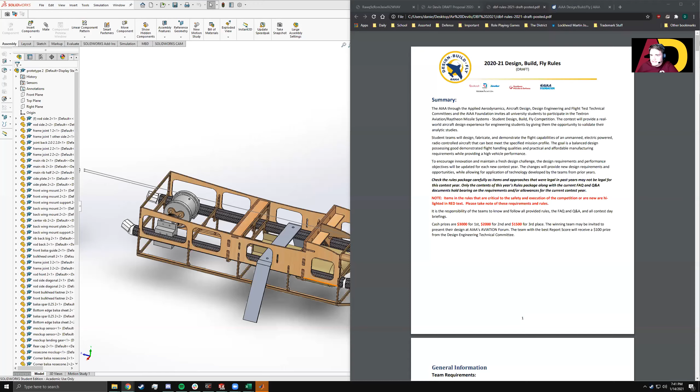All right, so yeah, we are Air Devils. We are the AIAA Design, Build, Fly competition team here at Arizona State University.

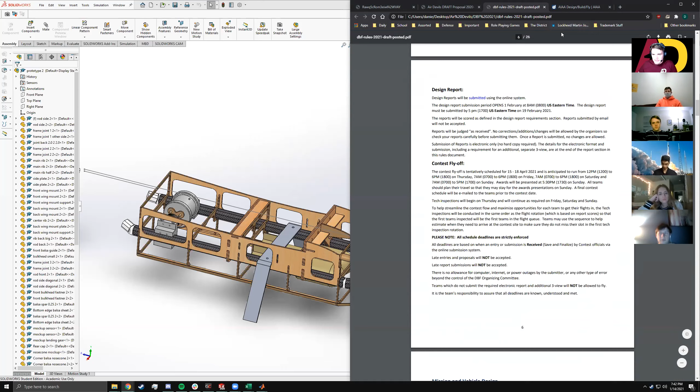Every year we design, build, and fly a new RC scale aircraft to compete in the AIAA's competition. This year it will be taking place in Tucson, Arizona in mid to late April. Hopefully in person, but that is still being decided. We will know more in the near future as they tell us.

This year's competition is to design, build, and fly a UAV with a sensor suite. It is supposed to transport a sensor in a shipping container, deploy that sensor mid-flight, operate the sensor, and recover it before landing. Our aircraft are generally about 5 feet wingspan, and generally less than 20 pounds.

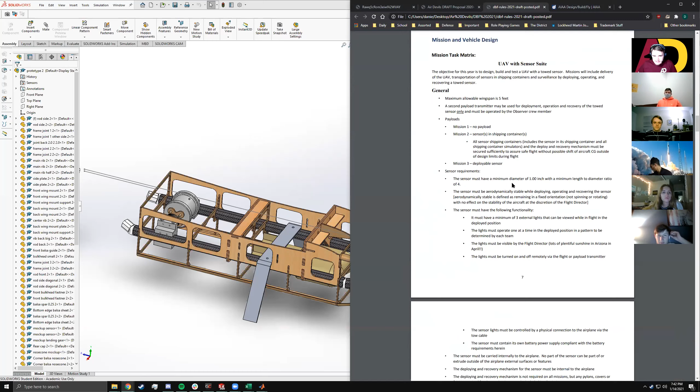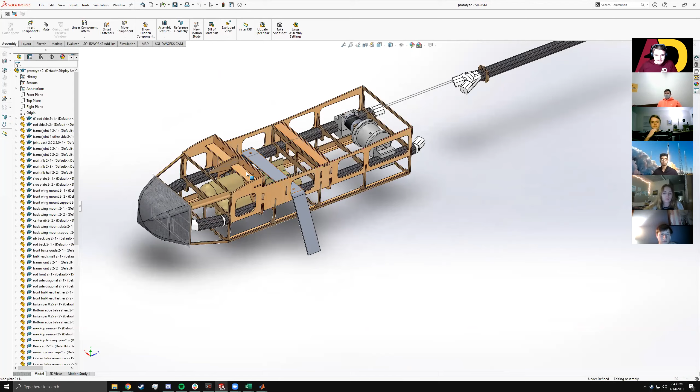This year's competition necessitates a lot of finicky mechanical devices, such as a bomb bay, a retraction and deployment mechanism, and a lot of flexible structural work to fit in the contradictory requirements of fitting a lot of sensors, but also going fast at competition. So we have been hard at work trying to encompass all of those requirements into a single cohesive airframe.

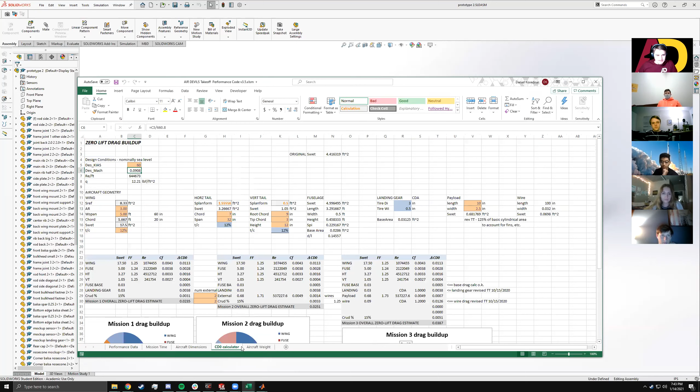In order to do that, we have been doing a lot of design synthesis with spreadsheets, trying to better estimate our aircraft's performance and size our aircraft before we actually build it.

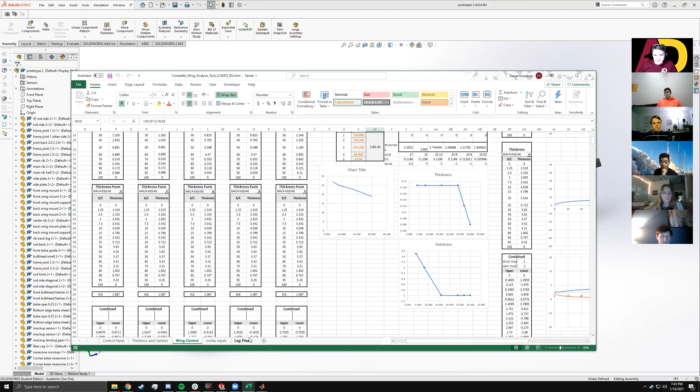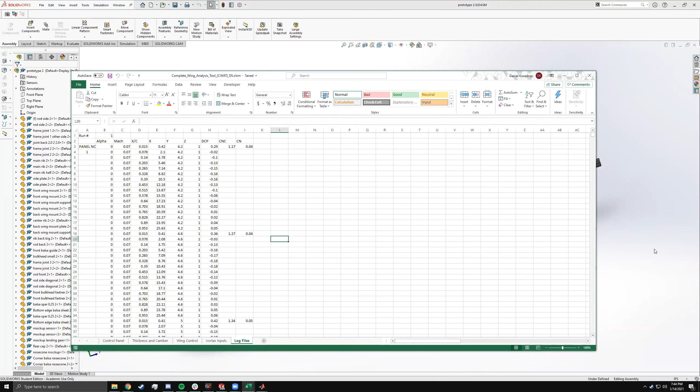We have also done a lot of aerodynamic work trying to design the best wing for our aircraft. That was me and Evan Barkers and Derek Stratton, who's not here with us right now. This was our graduate class project in the Advanced Aerodynamics class, MAE 564, I'm pretty sure.

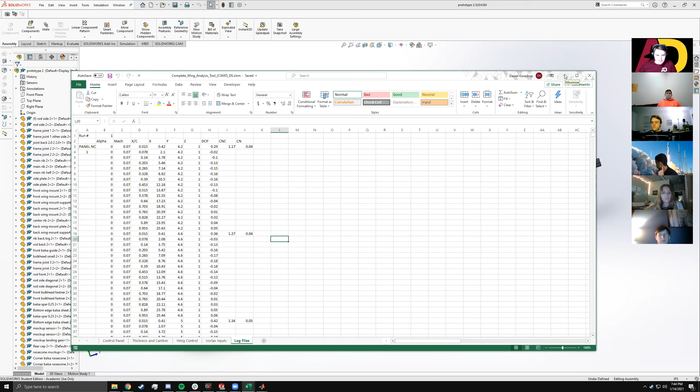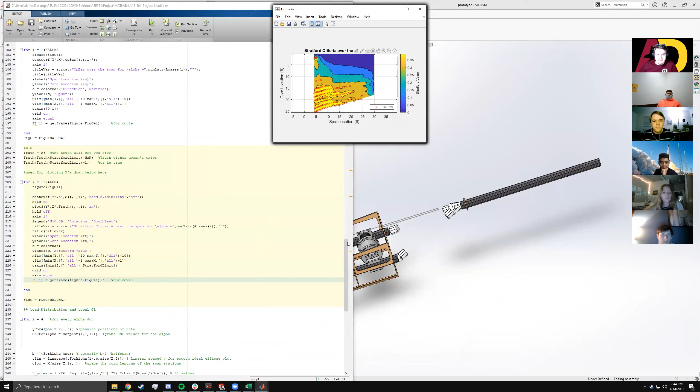Okay, this code has finished and I can show off some of what this is. So here you can see the approximate stall characteristics of this aircraft as we get into high alpha. We've done a lot of work to try and get this as smooth as it is.

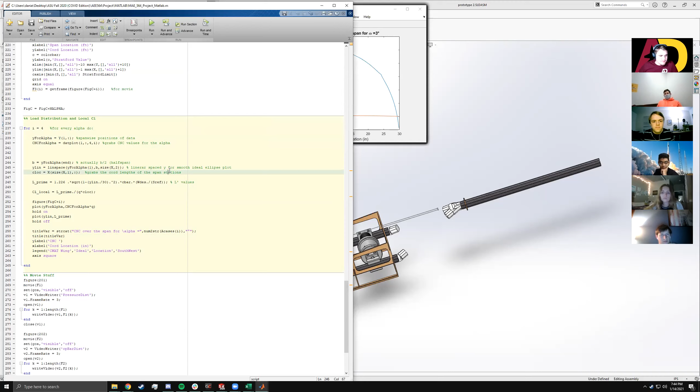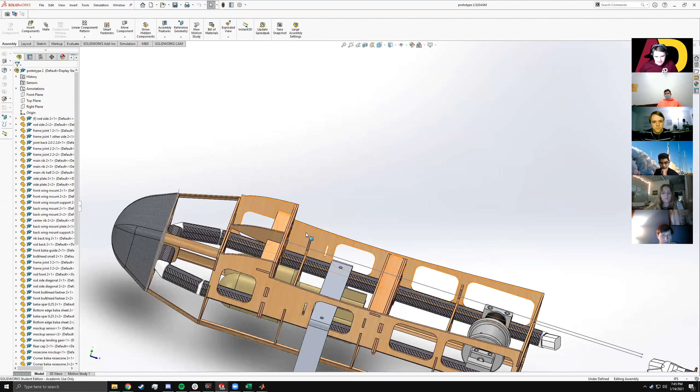So this is the work we've been doing so far on the airframe. We still have a lot of work to go in terms of actually finishing up the retraction mechanism right here. We have to finish up the bomb bay doors, and we of course have to build this thing, which requires a lot of laser cutting and 3D printing, maybe even some carbon fiber composite work in order to get all these pieces to fit together correctly and create a living, breathing, flying aircraft that doesn't breathe, hopefully. That'd be really weird if their aircraft did breathe.

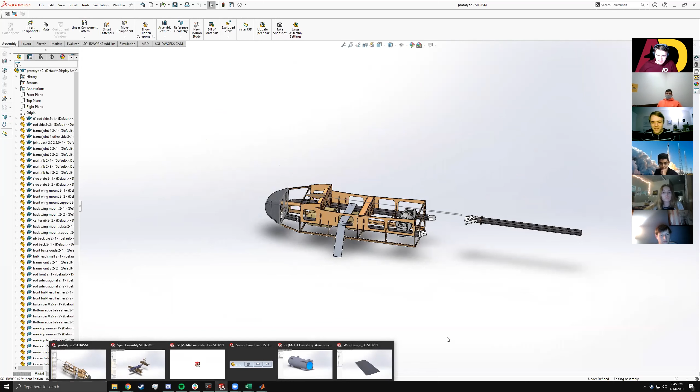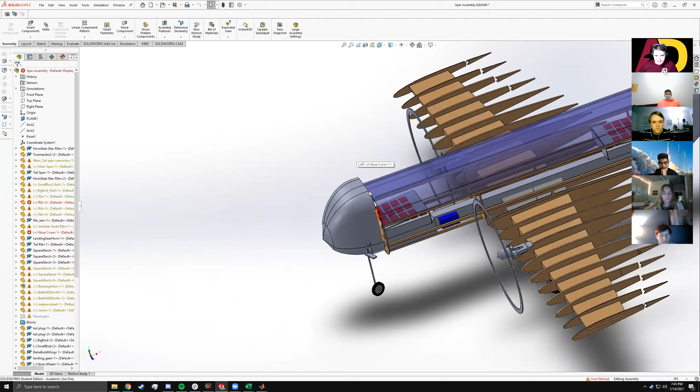So we've been hard at work trying to put together our airplane. For reference, this was the CAD model of our completed 2019 or 2020 aircraft. It has a few model errors in the CAD just because of the version change between last year and this year's model of SolidWorks. But other than that, yeah.

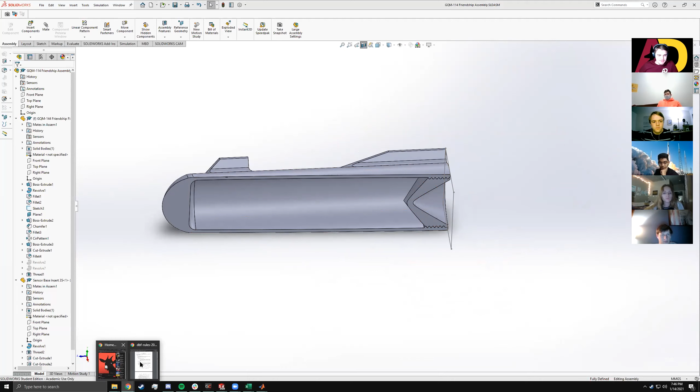Here is something I've been working on recently. It is a model of our new sensor. We got a change in the rules that was communicated to us, indicating that the sensor design was not what we thought it would be. And as such, we have been forced to change what our sensor looks like.

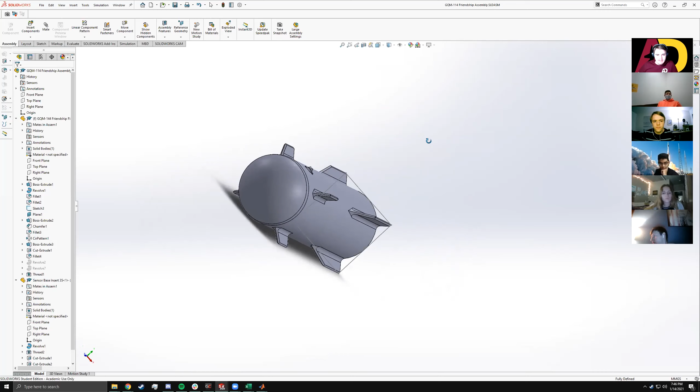I've been working on this quite a bit today, but it seems to be going pretty well, and I think it'll work out for having a stable design that is able to carry a bunch of stuff. There is a hollow back section that we can fill with weights and our sensor equipment. It has a towing point, fins for stability, that kind of thing.

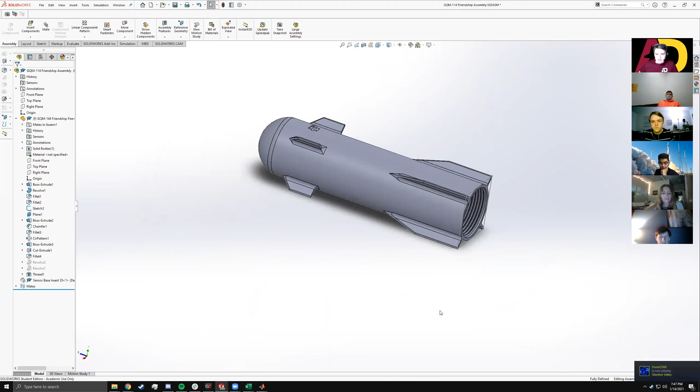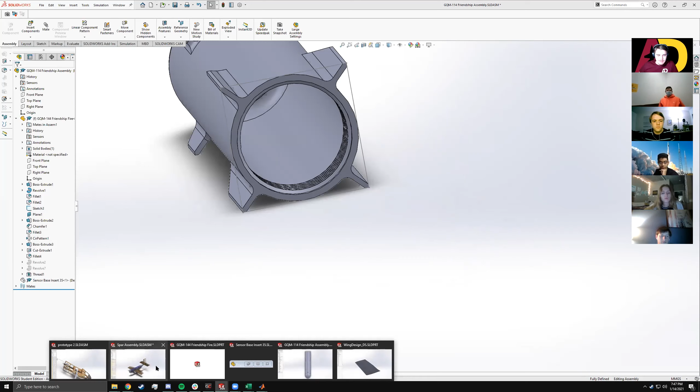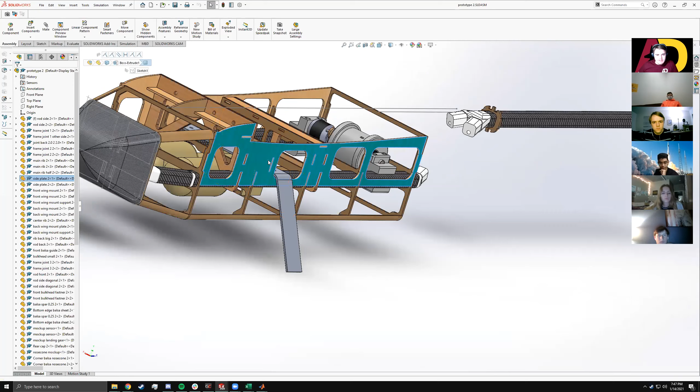To get into the brass tacks of what our meetings are like, this semester we'll be doing a lot of construction, as safe as we can in outdoor environments, assembling the aircraft from parts that individuals will get made on campus. For example, all these side panels will be laser cut on campus at the laser cut lab, over by ECG, where you can also get 3D prints done. We'll laser cut all these panels and fit them together, sort of like an advanced Lincoln Logs or Lego set.

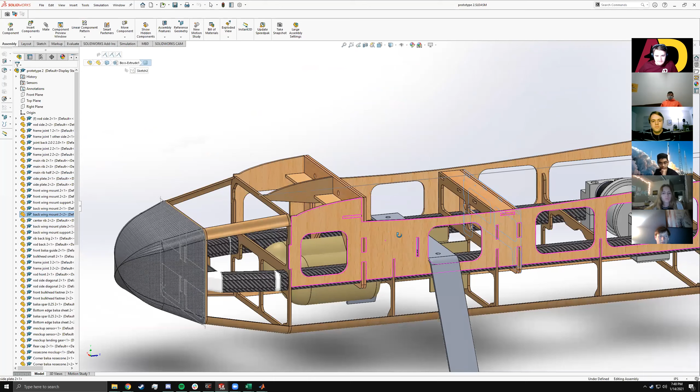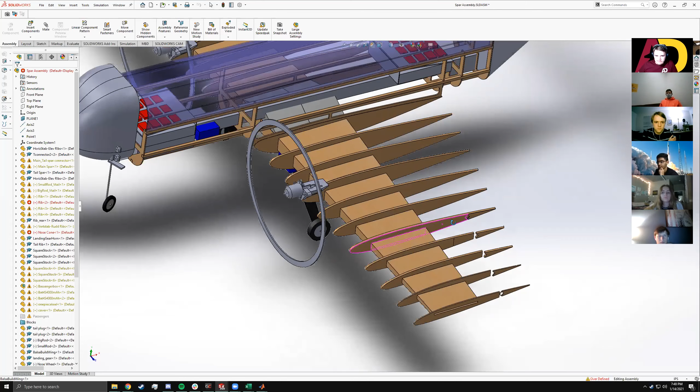That'll be a lot of fine labor to get all these parts to fit correctly, but that's what this club is all about. Once we have that done, the wing also needs to be assembled. It'll look something like this wing, where we have a central torque box that has airfoil pieces acting as formers for our design.

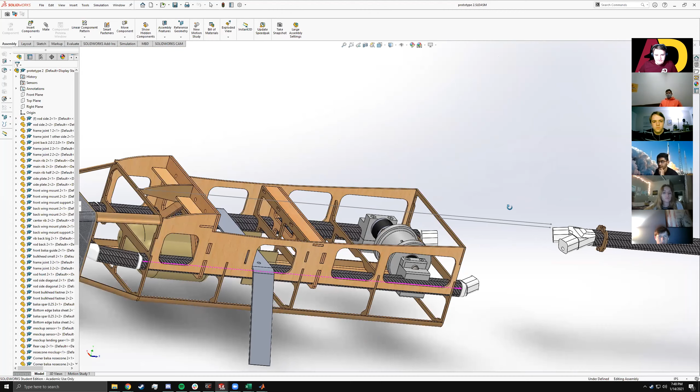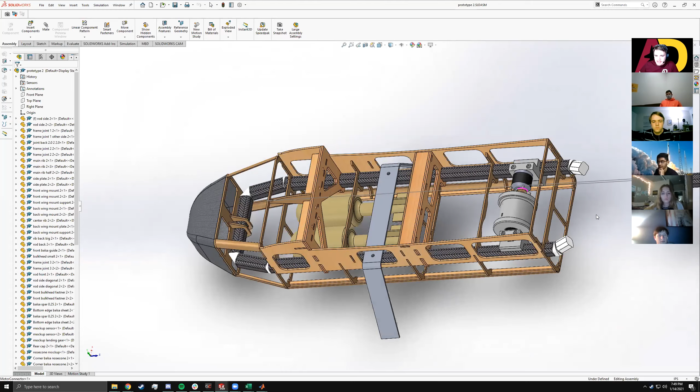We'll cover it all in plastic sheeting and we'll have a competition-ready aircraft. Of course, that's the ideal situation. In reality, we'll have to do a lot of fine-tuning and adjustments as we go on to correct any mistakes we find in assembly, as well as fine-tuning working parts of the aircraft, such as the drum mechanism here, which is probably going to see a few revisions before competition, as well as making sure the bomb bay down here works every time, because if it doesn't, I'll be very sad at competition.

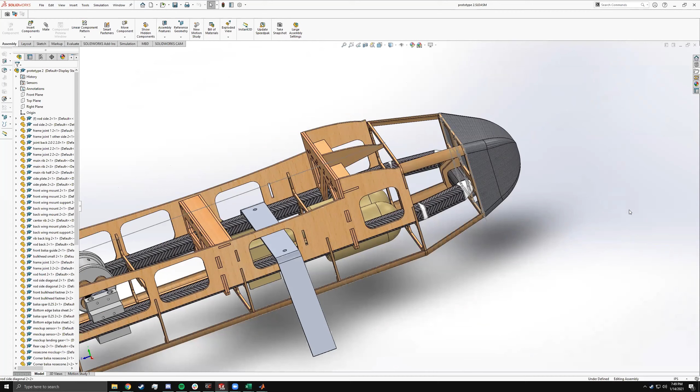Are there any questions? All right, so...

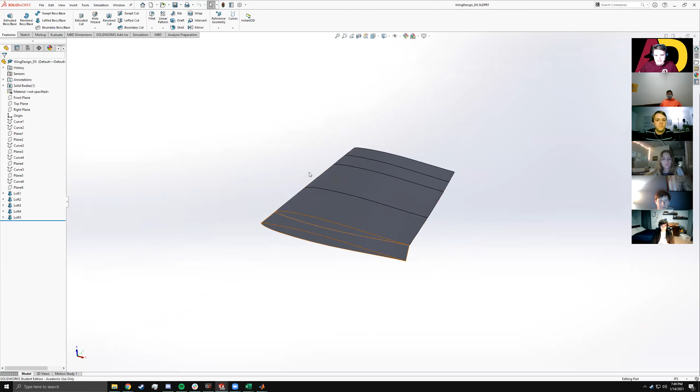I think Max and Evan Barker, have you guys been working on catching up the wing design, getting it from this shape into a better shape with ribs and stuff?

Talking to me about the wing? Yeah. Yeah, haven't gotten to that yet. Yeah, I never got into it over break.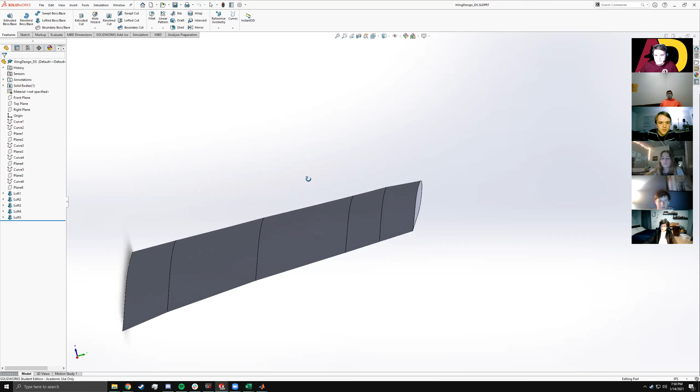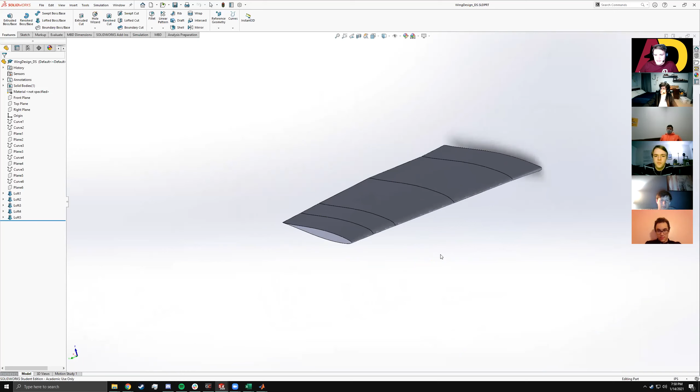Gotcha, one second, let me see if I can get Nick's code up. Our former president wrote a piece of code for us that will transform this amorphous, weird-looking wing body shape into an optimized profile that looks like this, with different material ribs for different loads that it needs. That's what we've been working on recently.

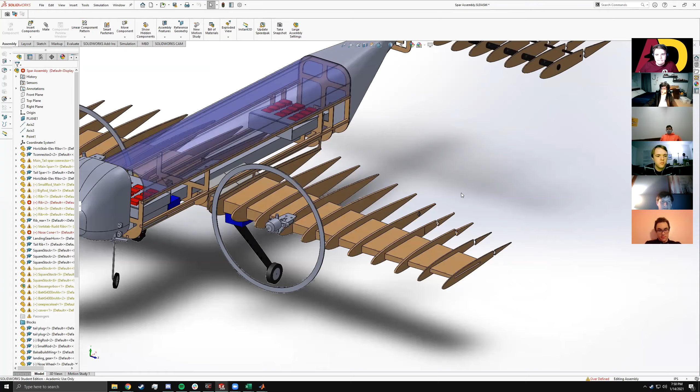Jack, are you working on Nick's code? I've done some work on it earlier, so I definitely can help with that. Okay, yes, it does seem a little bit broken at the moment. That's broken here, yeah. We'll meet up with you about that outside of the meeting.

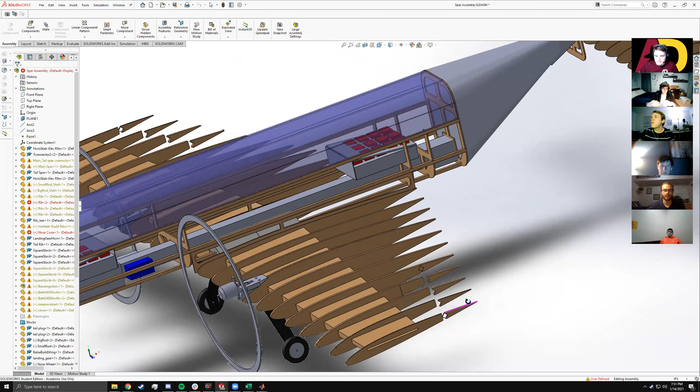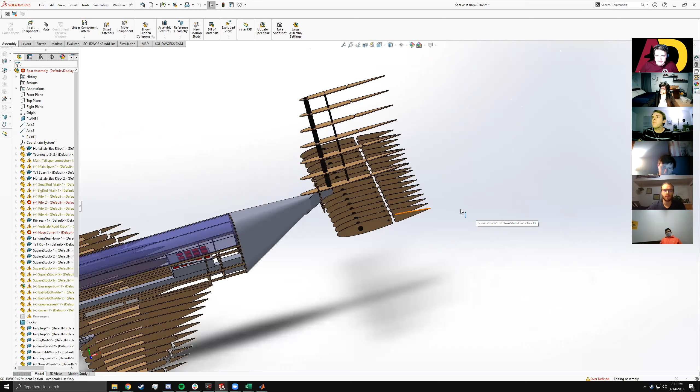And the question about the ribs at the end - they are the control surfaces, so they're attached with hinges. These pieces are ailerons, elevator, and rudder respectively. Yeah, so they're broken off, but that's because there are pieces that go there that we then hook onto the wing with small hinges.

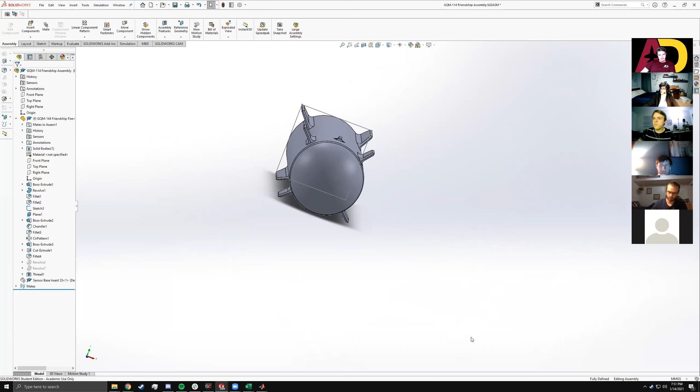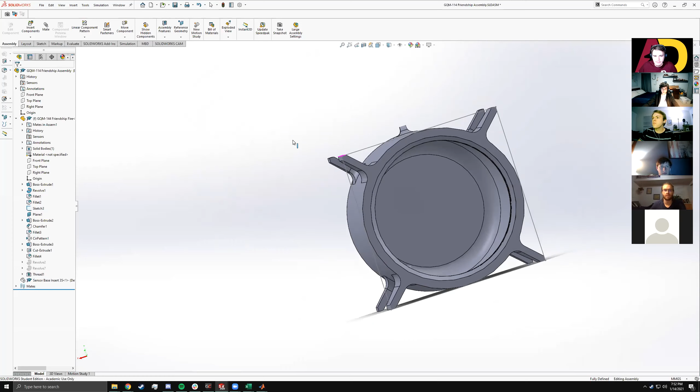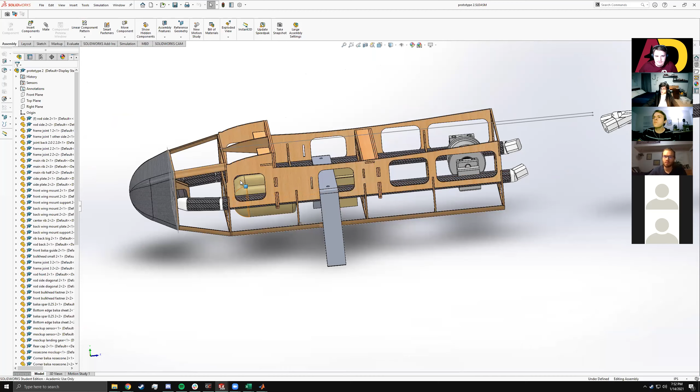Another thing we need to do for this sensor container is design the cargo container for it, which needs to protect it from a 10-inch drop on all 6 sides - like a cube. That should be fairly simple, can be as simple as a cardboard box, but it should also be very compact because we need to fit a whole bunch of them inside the aircraft. I'm hoping we can fit 6 inside, depending on how the aircraft ends up being on internal space.

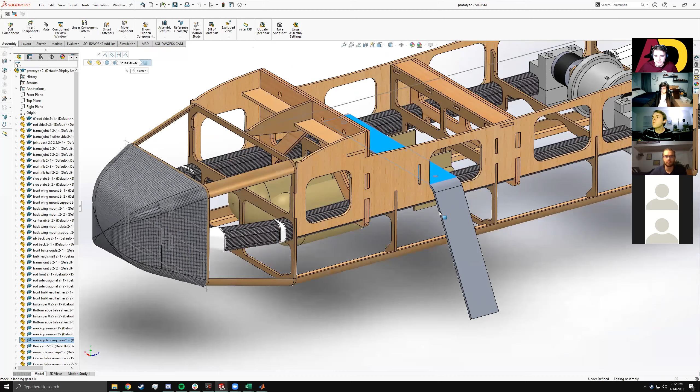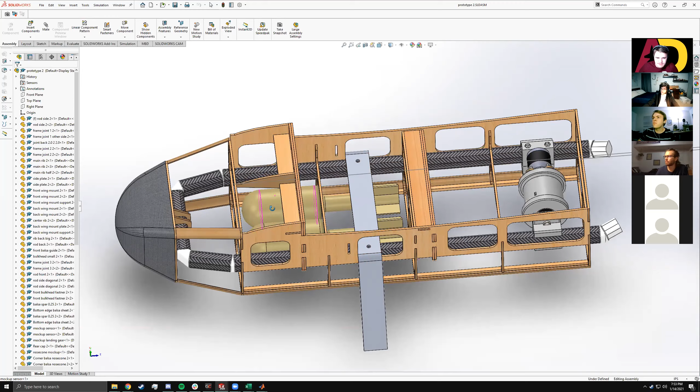One thing to note is there was also another change in the rules. I initially gave dimensions for this aircraft based on the assumption that we were allowed external stores, like payloads on the wings, like bombs. But it was released in the Q&A that all stores must be internal. So it makes our job a little easier since we don't have to design an aerodynamic cargo container for our electronic sensors, but it also means it's a little harder to fit a good amount of stores inside the aircraft.

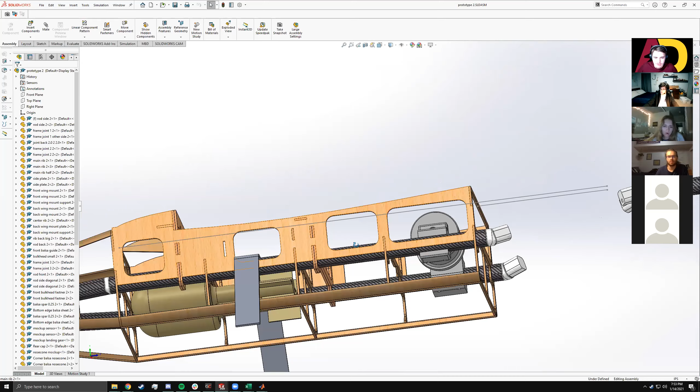Are the bomb bay doors going to extend all the way back to the drum, or is it really just going to be the sensor? It'll only just be this central bay area. Okay, so I think my dimensions will have to change then.

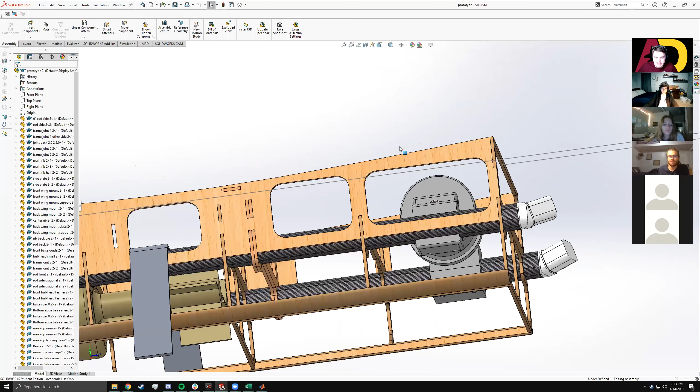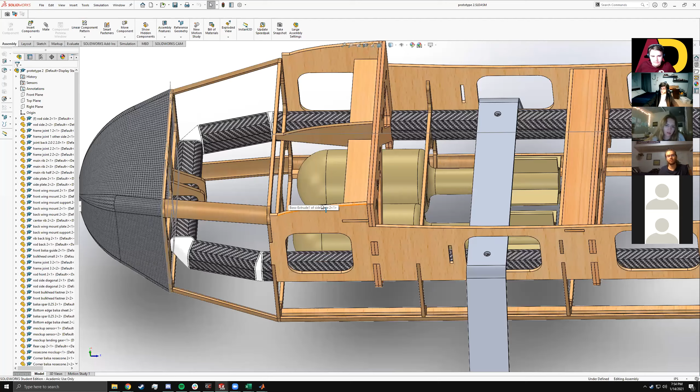What the second bay could be as well, because remember we're moving the drum up to the front. That will reduce our complexity a lot if we just have a simple container here, like maybe a hatch we can open up, throw sensors in, close. It doesn't need to be as complicated as the actual full bomb bay. Is there room in the fuselage to put that servo that's going to be opening and closing the doors? Yeah, there should be enough room forward of this bulkhead.

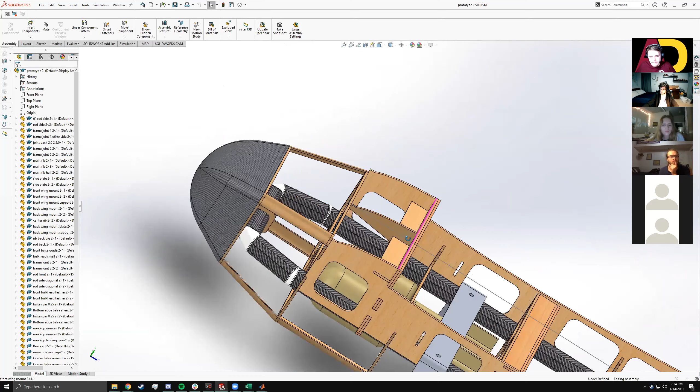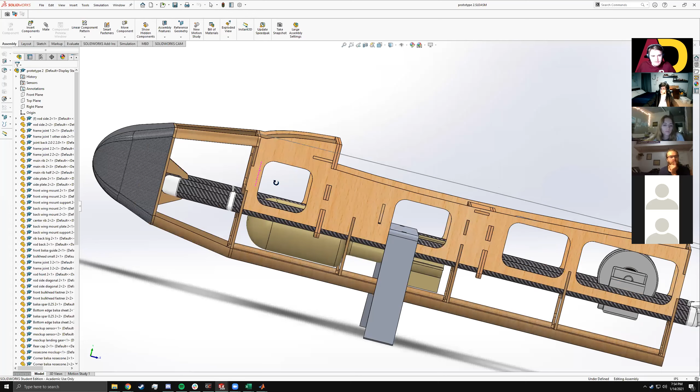One thing I need to do actually is throw the batteries into this CAD model, just so we can get an approximate location for them, so we don't end up accidentally occupying the space for the batteries with the retraction mechanism. Because Ivan, correct me if I'm wrong, but the batteries go up on top here. I don't really know, they could go anywhere since the whole deck goes all over the plane, so we can move it for balancing. Yeah, we could even put batteries here underneath the wing box.

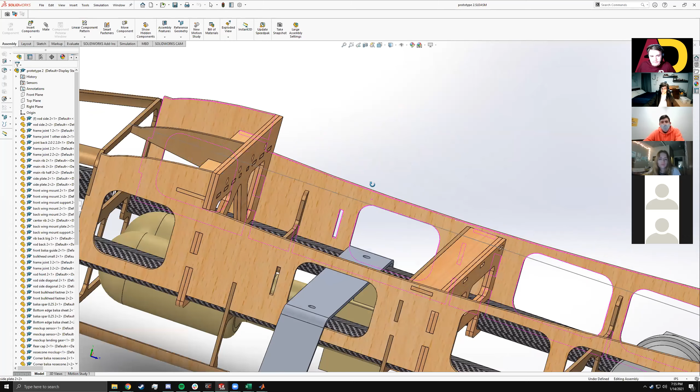Okay, I found Nick's code, so I can show that off for a second. Right now I have the batteries in the nose. Okay, so here is Nick's code.

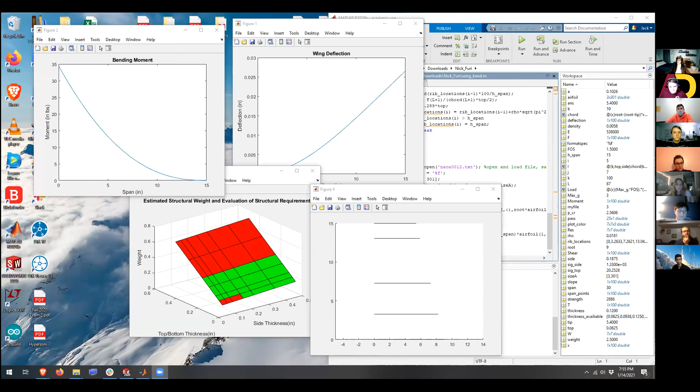It's just a MATLAB code, and what it's doing is it's given some parameters of the wing, some material strengths, the weight of the plane as input. It's calculating where the structural ribs are needed, and this right here is a top-down view of the wing. This is the center line, so it'd be rib there, rib there, rib there, rib there. It also tells you the torque box dimensions.

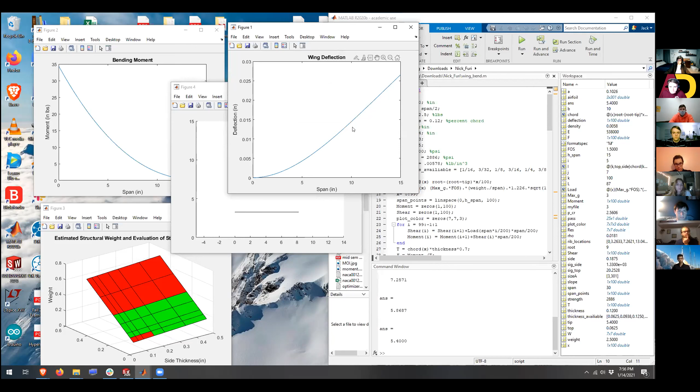And with that, we can get the lightest weight structurally sound design. It also gives some other info, like how much it will deflect and the forces in it. Using this, we are able to position both the ribs and determine how many we need. As you see, there's only 4 here, when the previous one had a whole bunch more.

In the previous year's plane, some of the ribs were not structural. They were just more or less cosmetic, to keep the form of the wing. So we'll be doing the same thing this year, where we have some structural ribs and a structural torque box, and some cosmetic ribs.

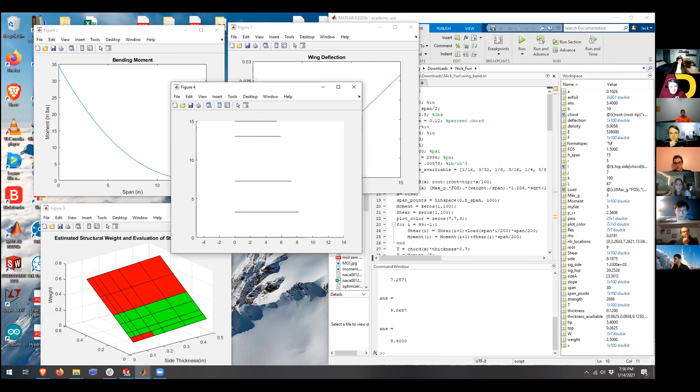Another change I want to make this year is equipping our aircraft with a 3D printed leading edge, in order to better build the aircraft, because one of the most labor intensive parts of the aircraft last year was applying the leading edge to the wing. That was a very labor intensive process, a lot of waiting too. If we can just 3D print something to go over the front instead of something more involved like hot forming balsa, that should work out.

So yeah, that is our current plans.